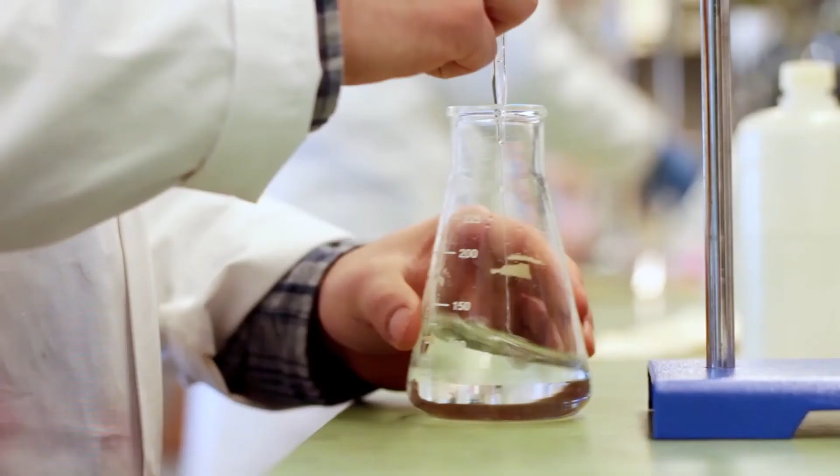Good morning and welcome to the mold making session, part of the Emerging Technologies in Automation conference. I'm Vladimir Franjo, Industrial Technology Advisor with the National Research Council Industrial Research Assistance Program. I started my career 30 years ago as a mold designer, and I have certainly been following the industry since.

There are a lot of exciting technologies around mold making, as with all the others in these times of new artificial intelligence technologies moving in that we are living. I'm really glad to have a group of speakers today that will present the latest and the greatest when it comes to mold making technologies.

The first is Amrinder Singh, engineer at Lincoln Laser Solutions. It's a long-time IRAP client, part of Whitfield Welding. He has a doctorate in additive manufacturing and over 3 years of industrial experience covering optimizing the process parameters, toolpath planning, and developing the feedback control system for defect-free additive manufacturing. Amrinder, welcome.

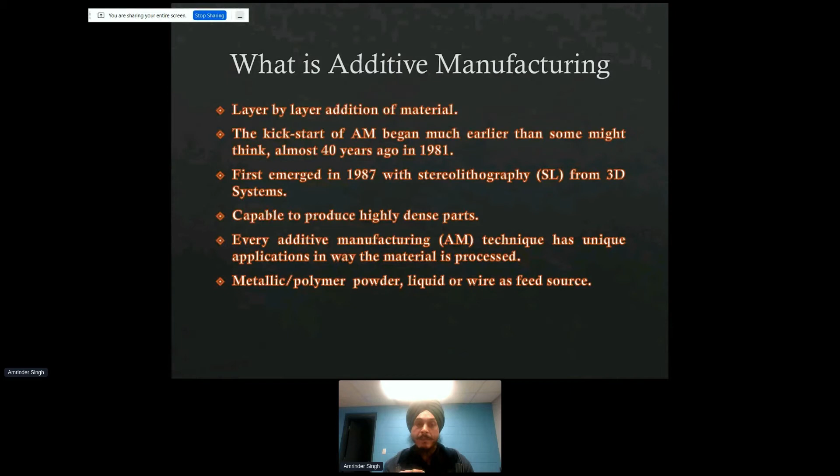Now, there are many kinds of additive manufacturing techniques available. I will classify them in two parts: one is metallic, another is non-metallic. My major focus will be on metal additive manufacturing, but I will just touch base on non-metallic additive manufacturing. In any kind of additive manufacturing, we can have a metal powder, liquid, or wire as a feed source and use it to make the layers.

Now, let me just touch base on non-metal additive manufacturing. There are majorly 4 kinds. I don't want to waste more time on it, but just touch base it.

The first is called VAT photopolymerization process, in which your UV laser hits the polymer resin and it solidifies. The platform keeps going down as you make each layer. One layer, platform goes down, makes another layer, platform goes down, and you keep building this big chunk.

In the material jetting process, instead of a liquid, you have wires, and then you melt it down to make a liquid, and the same way this platform keeps going down.

Then we have a liquid binder in this process, which is called binder jetting process. In this one, you have a powder bed, and you put a liquid binder on top, bind one layer, platform goes down, bind next layer, and you keep making the part.

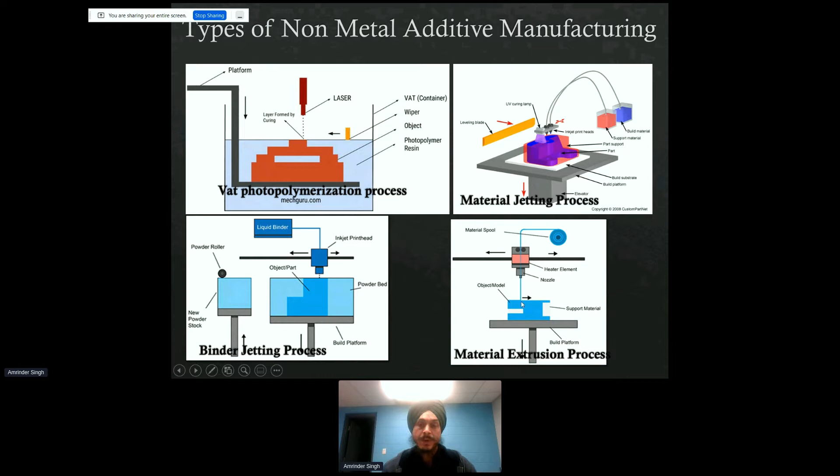This is the most famous now, material extrusion process, which we can buy at Best Buy or Amazon, where you have ABS or PLA material coming right through the nozzle, where you have a heating element. It heats just above the melting point, and it keeps adding layer by layer.

Now, this is my main focus, metal additive manufacturing, in which we have 2 different kinds. One is powder bed, and one which we are specialized in is called directed energy deposition process. In the powder bed, you have metallic powder on one side, which is called the build platform, and on the left-hand side you see the powder delivery system. So powder comes from the delivery system and goes on the platform to make the layer, and you have a laser coming from the top.

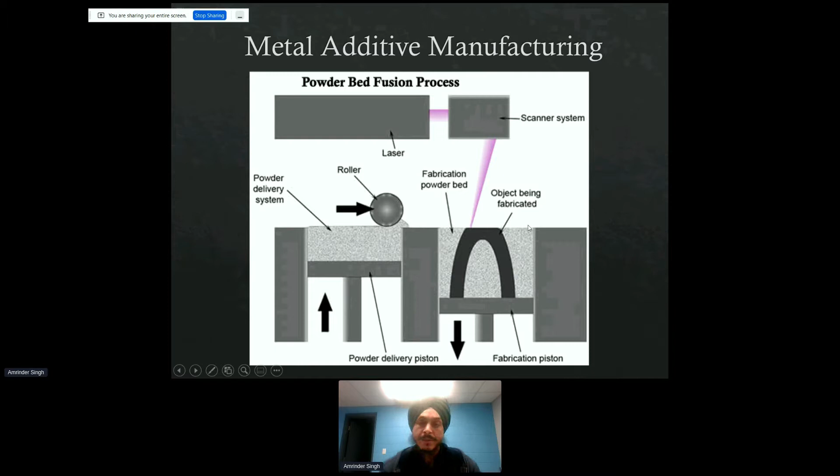So just giving an idea, because I want to focus mostly on my DED system, which will come in the next slides. What are the advantages here?

Well, the big one is freedom for design. Custom-made parts without any special tools. We can use multiple materials at the same time to make those layers. For example, you can make one layer with one material and the next layer with a different material, or one inside and outside, both can be different materials. Repair and remanufacturing - I will show the example and the application more as we go ahead.

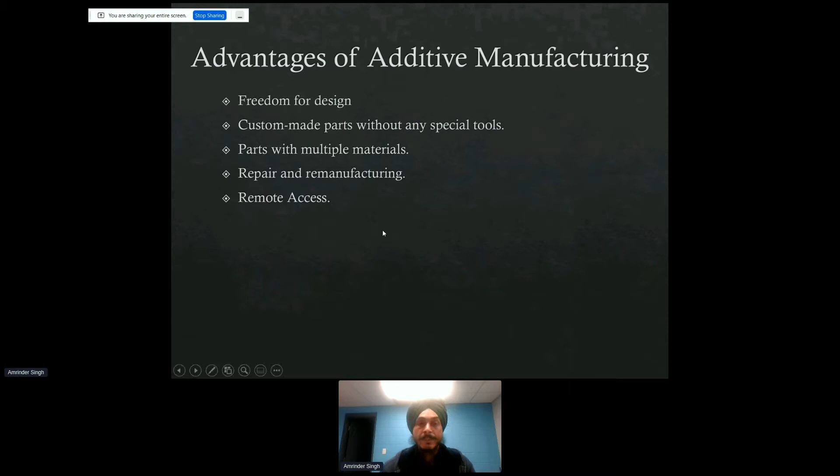This is just to give an idea why I'm talking about additive manufacturing here. Remote access - people can sit anywhere in the world, make the toolpath planning, and just push it out. It can be Mars or Moon, and the machine can be there, and you can just give the command and start right away. Someone can think, oh, it is very expensive. It depends. For example, if you keep customizing and you have a complex design, it might not be too expensive in the long run.

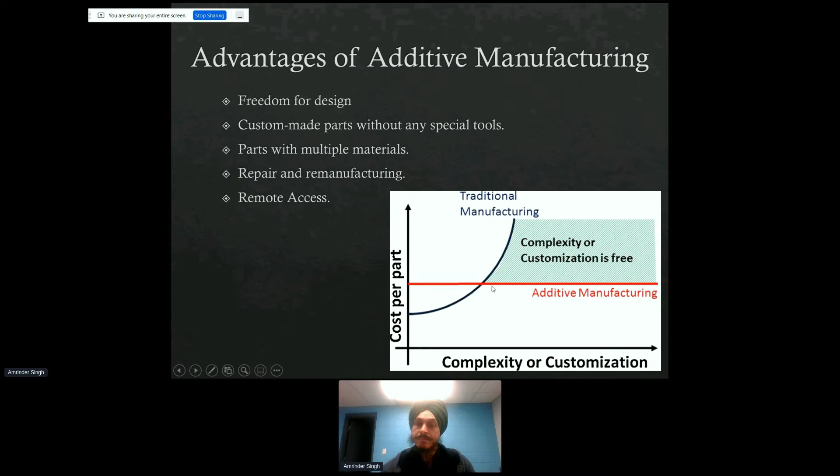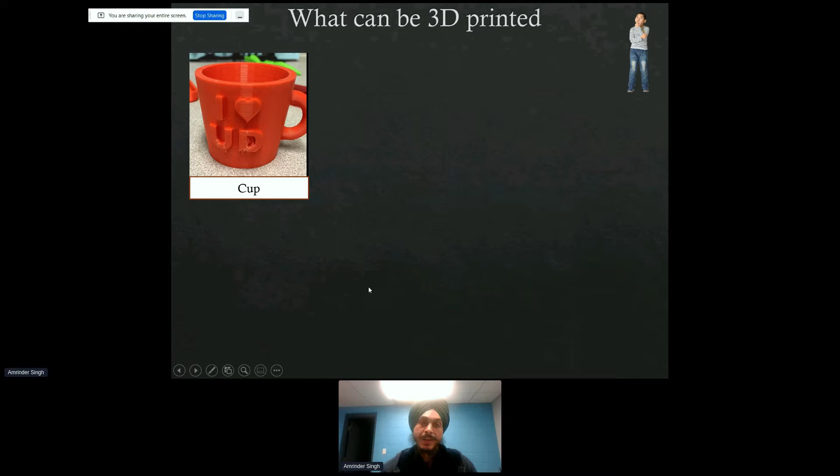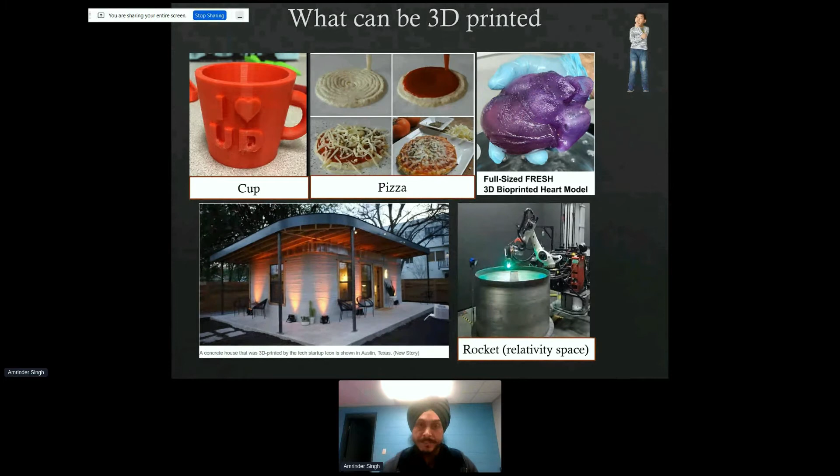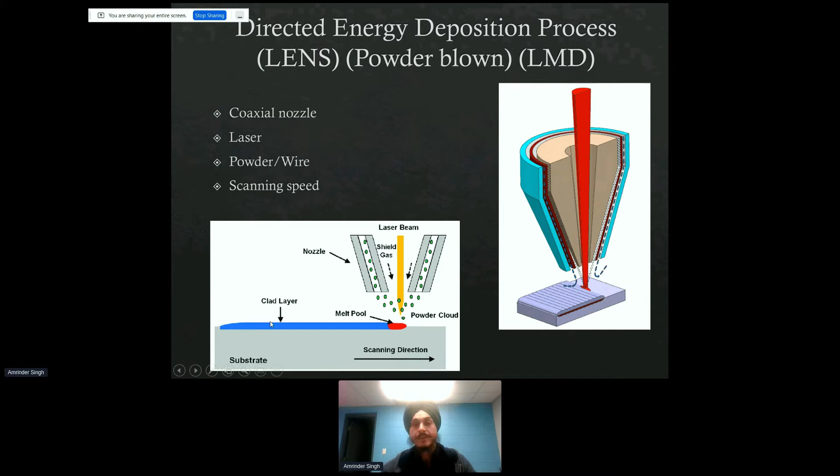Now, before we go ahead, let's touch base on the complete system functioning. So we have to have a controller which can control our movements, a powder feeder which can feed the powder to our coaxial nozzle, and the argon gas. As we are cladding or doing additive manufacturing of parts, we have to make sure that the melt pool does not come in contact with the atmosphere. For example, iron-based alloys can get oxidized very easily, and then we can have defects in our final product. So that acts as a shielding gas.

Not only powder, we can use a wire feeding system. Instead of powder, we can use a wire feed system, and then this is called wire arc additive manufacturing, WAAM. I'll go through it more as we come to the next slides.

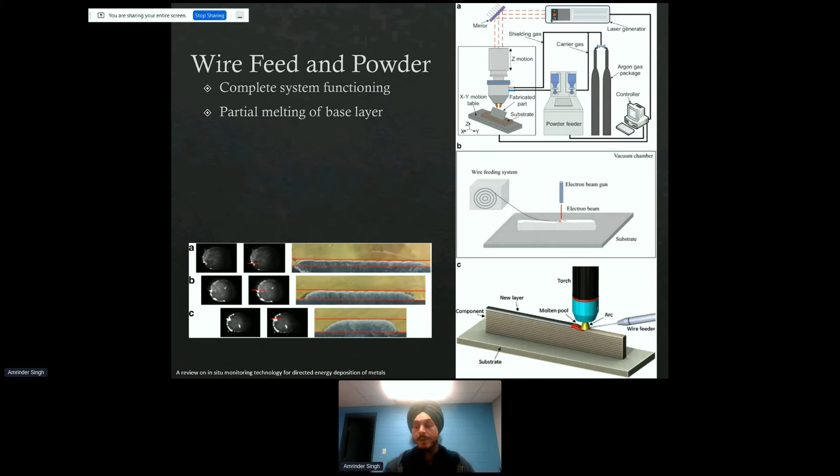So the best benefit of the directed energy deposition process is that when we make a layer on top, you can see we just partially melt the substrate or the previous layer, which makes a perfect bond, or metallurgical bond, with the base material or with the previous layer.

Now, in this process we have 4 different laser processing parameters which have key significance: laser power, scanning speed, scanning pattern, and powder feed rate. More the laser power, more the dilution, and higher the layer height. Higher the scanning speed, lower the height.

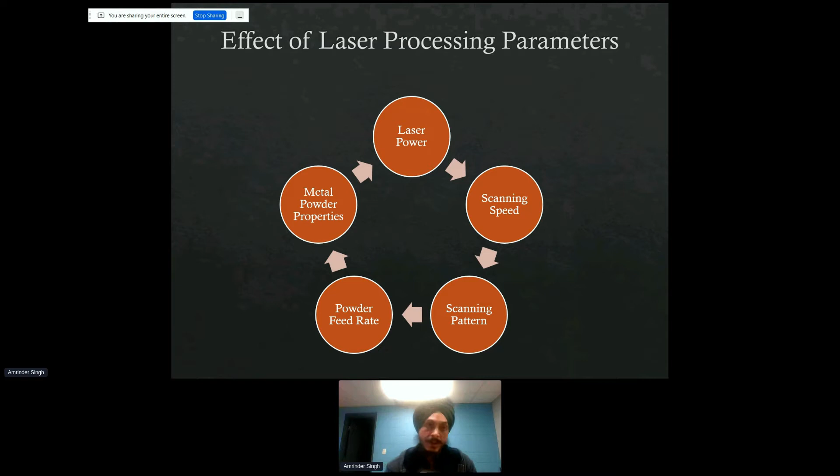So as we can see, all those parameters affect our deposition rates. Mostly the layer height is the key parameter which affects our deposition. The higher the layer height is, you can see we have gone from 0.05 to 0.1 centimeters, pretty much like 1 kg per hour. So it's a significant improvement.

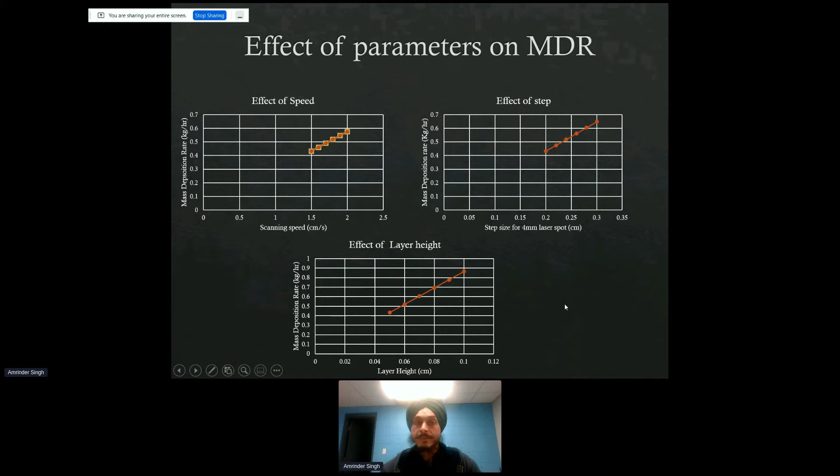Now some might think it's a slow process. We know we can do it - no, that's not true, it depends. In DED we have 3 main technologies available which I just showed you. Second one is electron beam, and third is arc plasma directed energy deposition process, in which we have wire feeder and then a torch. This is all computer controlled.

With this we can have a layer of 40 thou, and deposition rate can be as high as 10 kg per hour. Now if we need a thin layer only and it has to be produced faster, we can do that too, using our powder flow process and still have very, very high speeds of pretty much 1,000 millimeters per second.

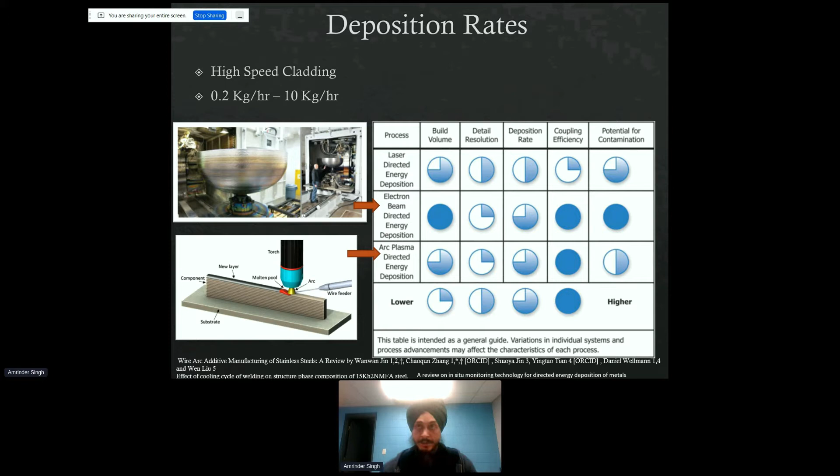Now let's talk about dimensional accuracy. Laser spot size can go from, in our facility, 0.5 millimeters to as big as 50 by 50. But at this bigger spot size we don't do cladding. For cladding we have 0.5 to 6. We can do hardening at 50 by 50. This is how this single layer, single wall is created by the system.

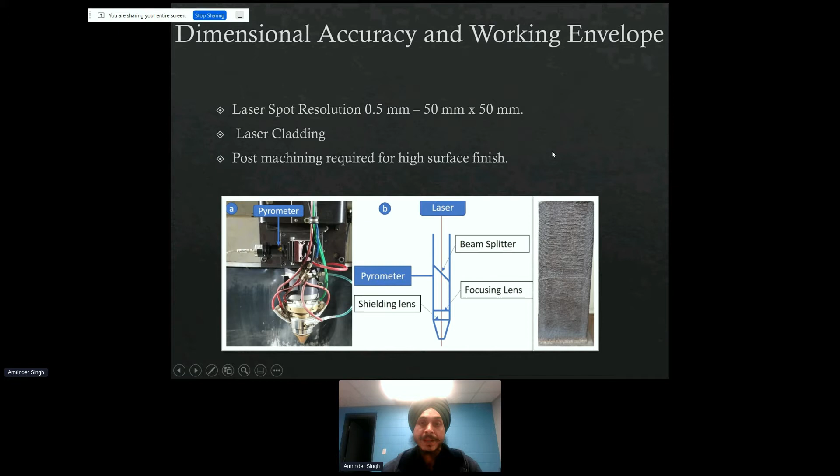I'll skip this one, but this just shows that at the same spot size we can vary the deposition rate depending upon the production. The whole motive of showing you the mass deposition rate is that there is flexibility where we can make it faster or slower, but again it depends upon the design and what the material kind is. But there is a range of flexibility of the mass deposition rate. So it's not slow, it's faster. But again, it comes to the part - what is the part about?

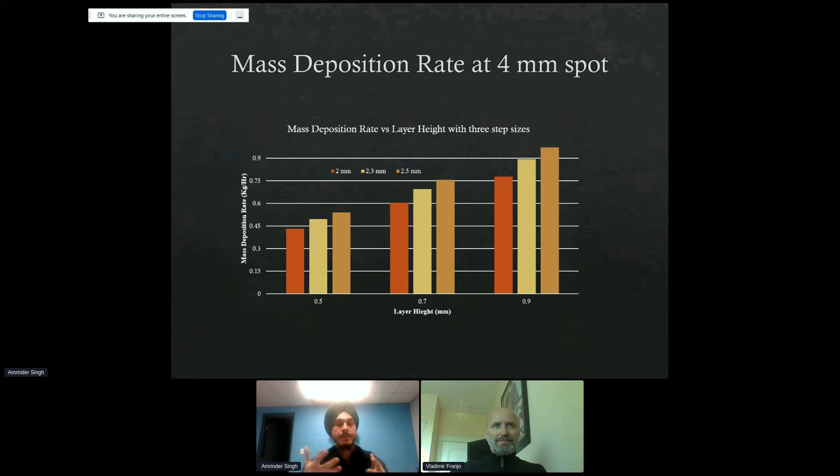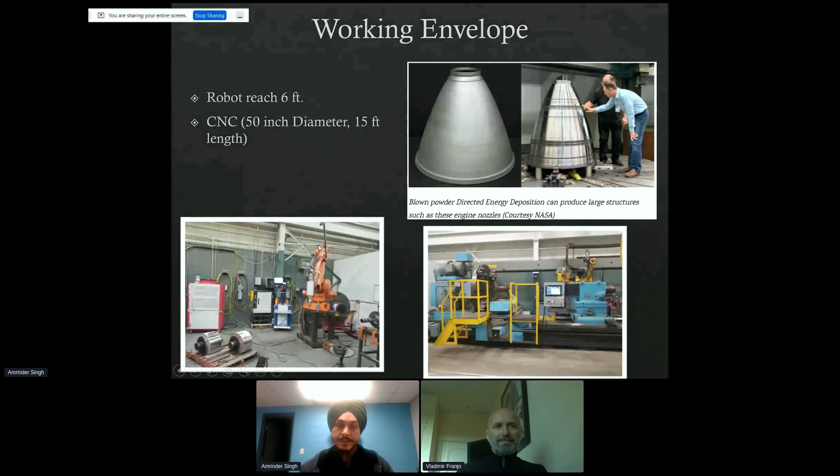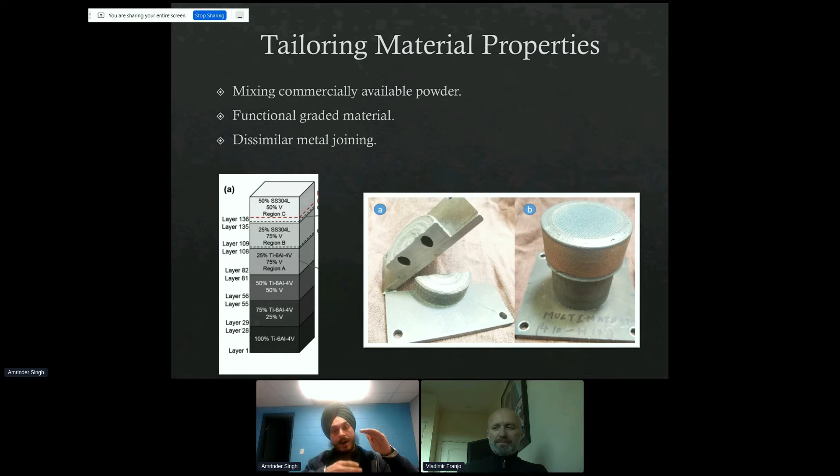Why is this technology so important? Because we can tailor the material properties. If we need a hard material on a soft one, yes we can do it. If you need a functionally graded material, we can do that too - we can have a different composition of different powders in every layer. For example, if you have a material which is softer on top, hard on the bottom, we can go gradiently harder, not just from soft to hard, to retain the properties.

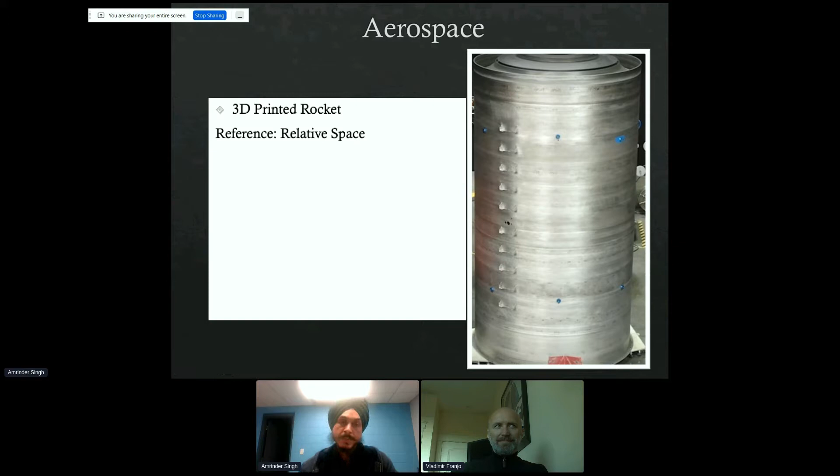Applications: aerospace, automotive, agriculture, tool and mining - infinite amount of application. Let's go aerospace - this is a 3D printed rocket. We don't deal in aerospace, but if it's a crazy idea, please go for it. We can have a discussion about it.

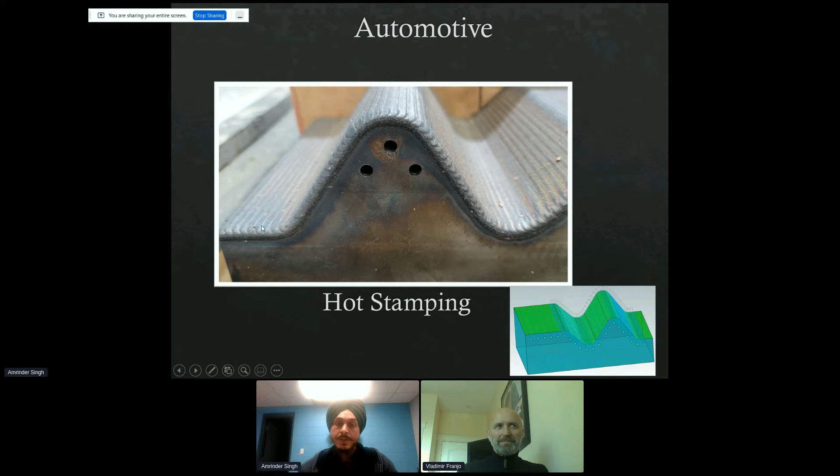Automotive - recently we made a hot stamping die. We did a cladding with a hard material on the hot stamping die. Just to show you the numbers, the clad was 60, and the base material was 30 HRC. So we made it from 30 HRC to 60 HRC, and pretty consistently.

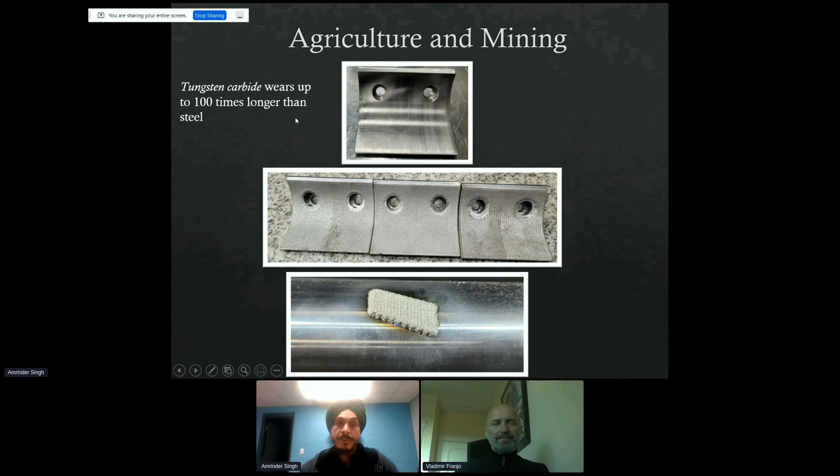From agriculture, we had this agriculture part - this is the shape of it - and we put tungsten carbide onto it using DED and made that steel 100 times longer wearing than regular steel. The tungsten carbide wears up to 100 times longer, so this part has now got 100 times more life than it was before.

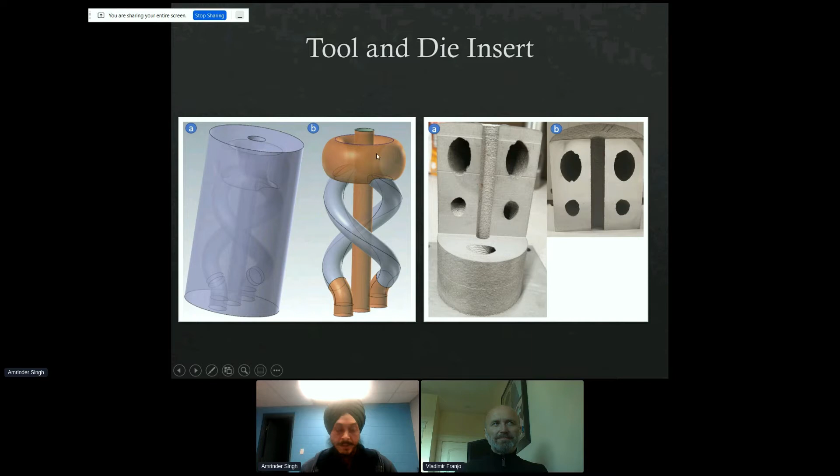Tool and die insert - so we can not only do cladding on the top surface, we can manufacture things layer by layer too. This is a perfect example: we made a die insert here using 410 stainless steel and made a spiral cooling channel which goes in, comes out, and we made a hollow structure on top which looks like this.

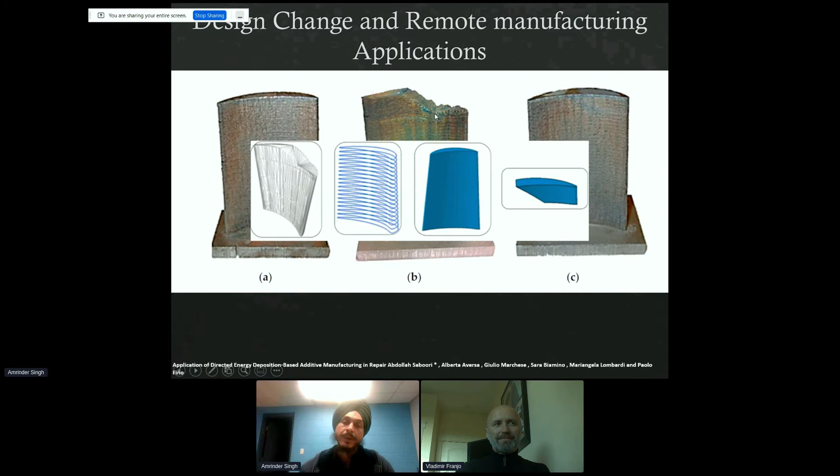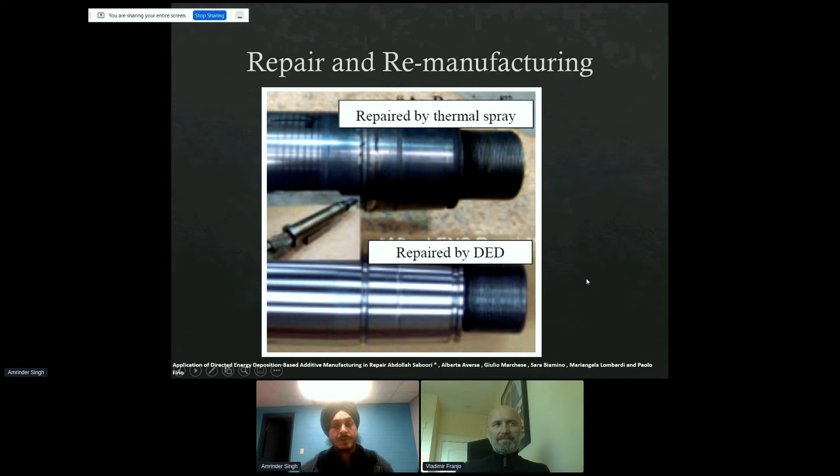We can repair the parts. For the turbine blades, if you're missing a chunk of it, it can be repaired back up again. Repair and remanufacturing. So not only can you make the things, but the reason I'm showing this repair here is because you can see that if you use thermal spray, it has a lot of heat affected zone, but by DED, you can repair the same thing having the least amount of dilution and least amount of heat affected zone.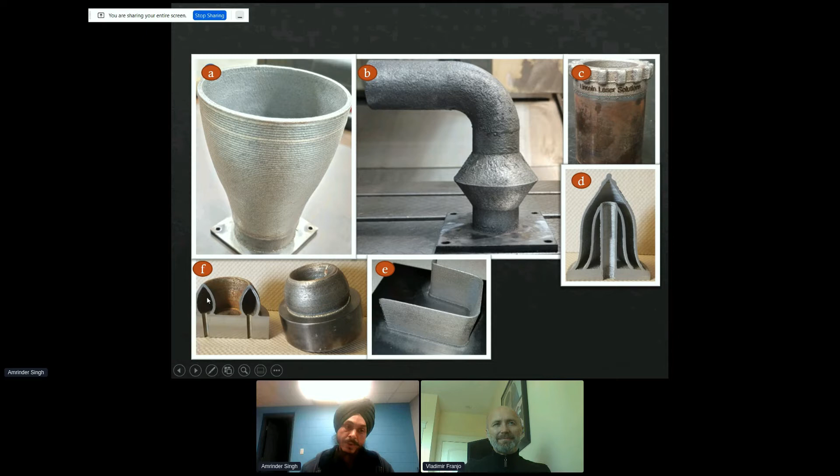Recently, we did a production job for a water cooling jacket. We had this base, and this is the final product. We 3D printed the cooling lines and the whole structure on top of this base supplied by the customer.

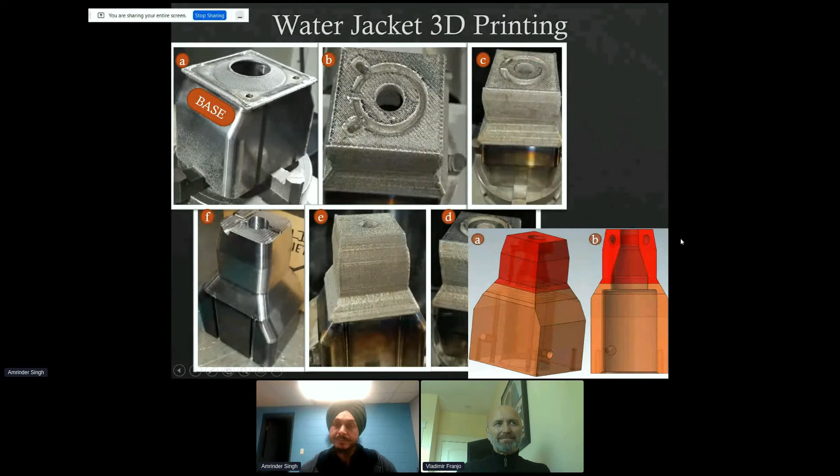And this is an in-house project we have. This was in the furnace, which used to supply the air inside the furnace, the hot air, and we remanufactured it and it's still working and functional.

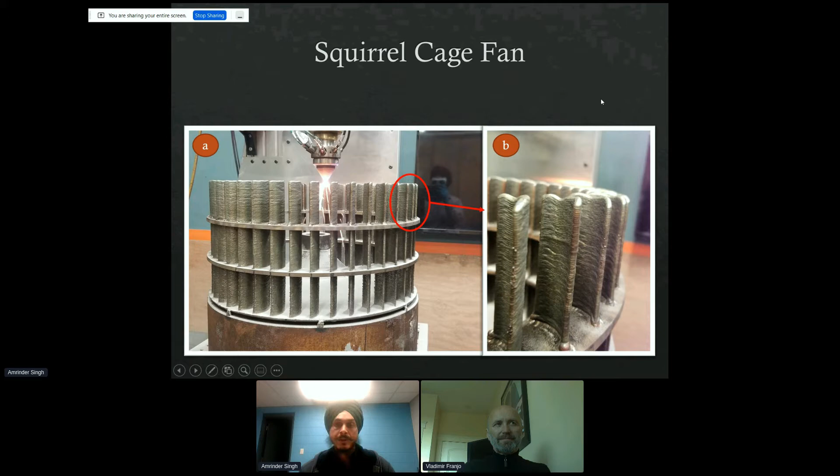There's something we made, a lifter, just to save material for them. I don't have much time to explain, but let's show you a picture here.

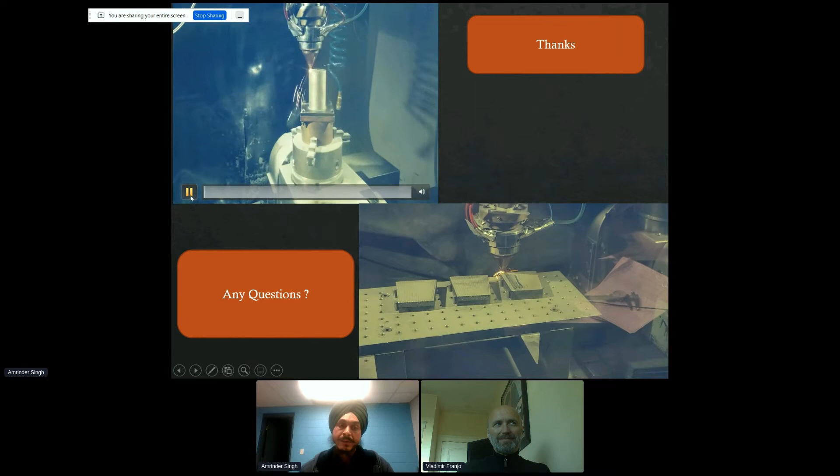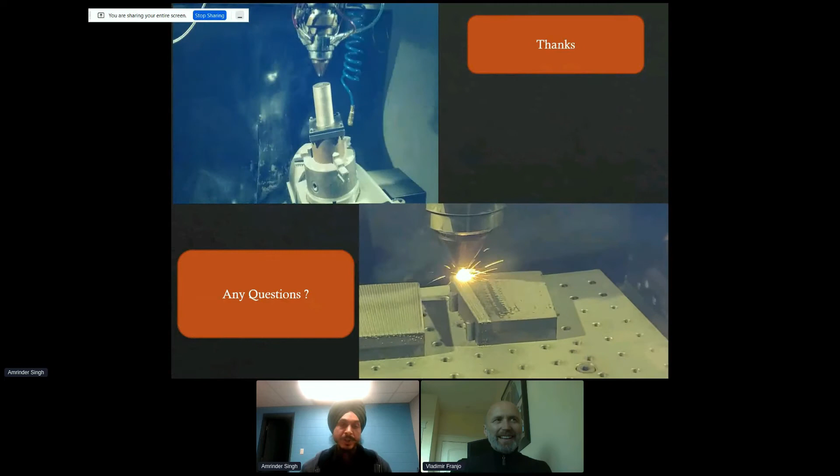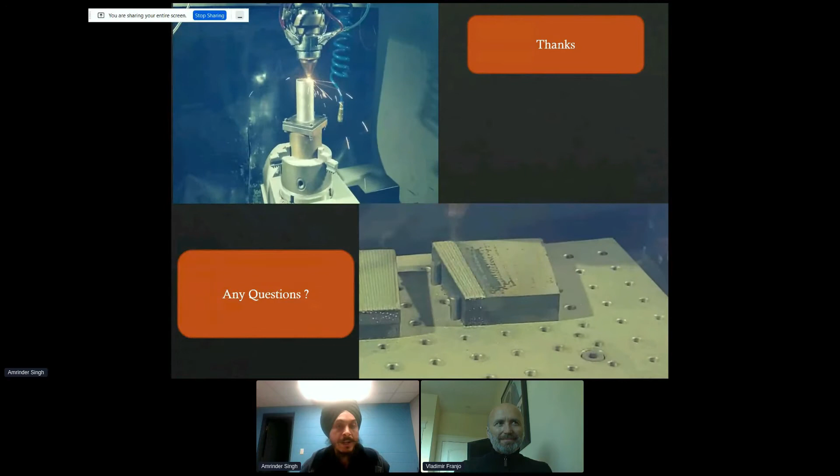So any questions for me? I was a little bit faster because I had limited time. Thank you. But I wanted to show you the scope of an application of the additive manufacturing technique, especially the DED, where you have a better metallurgical bond, and it has infinite applications. So please let me know if you have any crazy idea in your mind. Thank you so much, I am open to any questions.

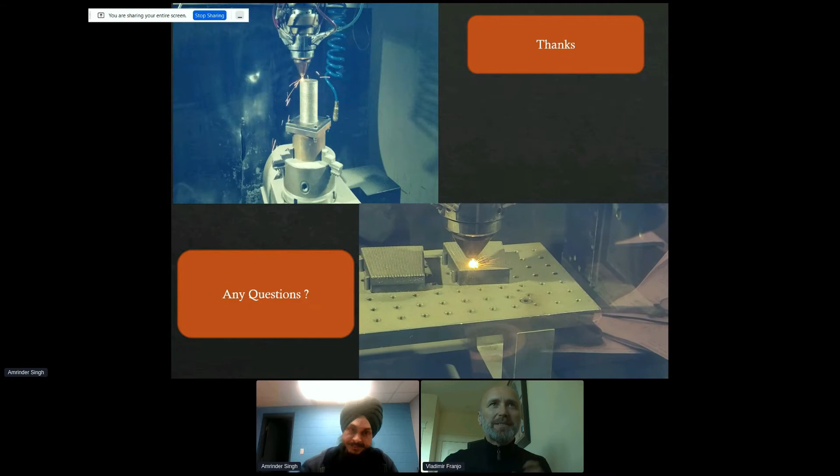Thanks a lot. Unfortunately we're kind of running out of time, but in the presentation there was a question regarding the size of parts that you can manufacture, and you have covered that in your presentation, sort of. But maybe you can clarify, because your technology is capable of handling large parts, how large of a part can you handle?

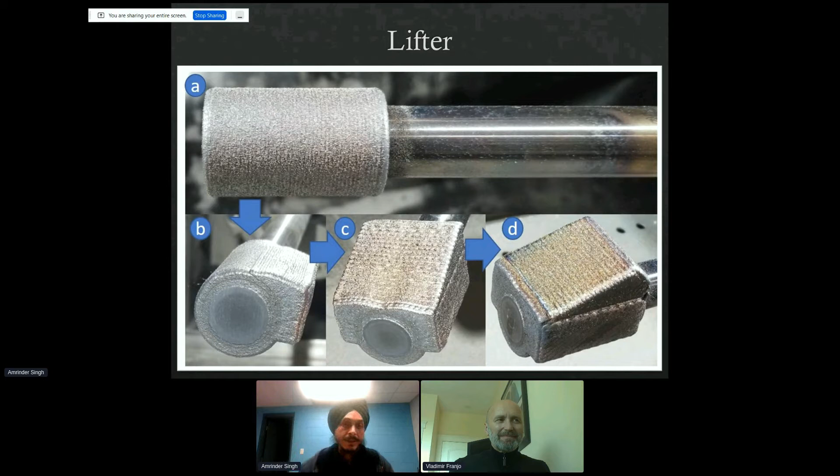Well, practically we have a 3 meter robot which can print a 3 meter big part. But we can always enlarge our envelope if there's a requirement. For now, the largest would be 3 meters from our robot's point of view. We also have a CNC, which, for example, in these two slides you can see, has an envelope of pretty much 12 inches higher and 24 inches on the sideways.

So let me start with a basic definition of digital twins. Essentially, it's the virtual representation of a physical product or process. That's not the full definition yet, but we've been looking at these types of digital twins for a long time. When we look at a schematic, a blueprint, a CAD, or even virtual reality, essentially that's the representation of the fit, form, or function, or the virtual representation of the physical part.

So I mentioned that we have a physical product or a physical process, and we have the virtual product. Now, what makes this digital twin important is the connections between the physical and the virtual. So we'll have some kind of communication between the physical and virtual product. It's not just enough to be a representation, but we need a connection. So what is that connection?

And that's data. So now we can expand our definition of a digital twin to say that it's the virtual representation of a product or process using data, and not just any data, it's real-time data. For example, we can put sensors on a physical product, and those sensors will generate data and then transmit to our virtual product. So then what do we do with that data?

The virtual product has to do something with it, and it provides information. So now we can fully define our digital twin, which is the virtual representation of physical product or process using data, and using that data to provide information by analyzing that data. Essentially, when the physical product generates data from the sensors that's transferred to the virtual product, we analyze that data and provide that information back to the physical product so we can then optimize it. That is really the essence of a digital twin: making sure there's a constant communication flow between the physical and virtual environment so that we're always optimizing that environment.

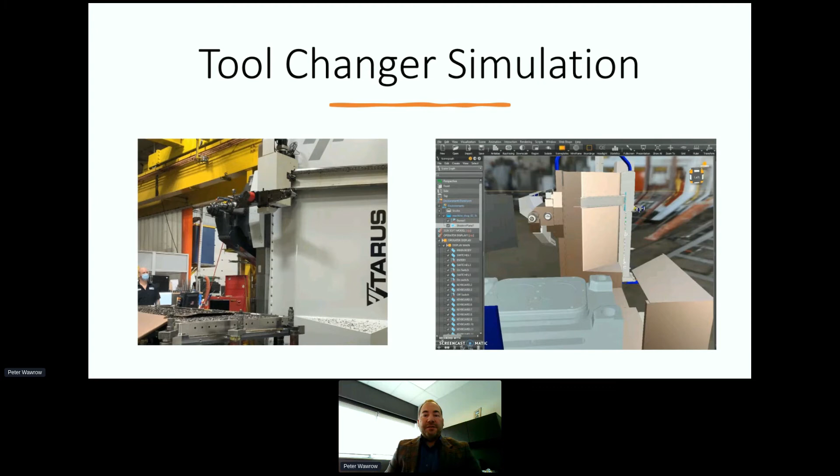So the next steps would be to start putting sensors on that physical part, collecting data, and then generating that information or data analytics. With that, I'm going to pass it over to Linsey and have her present the virtual reality aspects of what we had done with respect to this project.

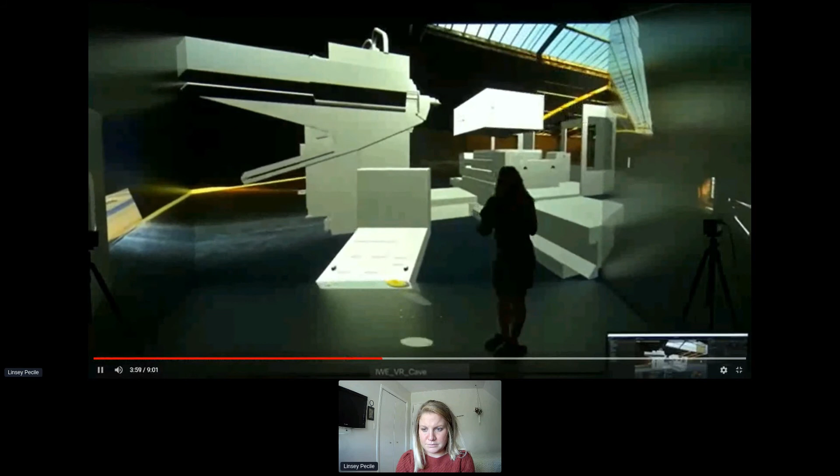So it's not showing you what I told it to do. It's not showing you like a video game where I tell it to move 4 feet to the right and it actually moves 4 feet to the right. It's actually reading the program G coding of the specific mold and the cut path that it needs to take, and showing it up here for you to visualize in the VR cave before you actually implement it and design it and cut it on your shop floor.

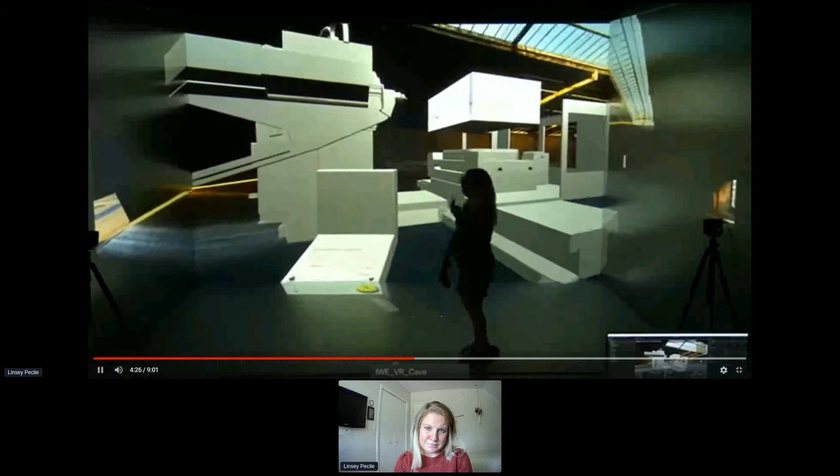So drastically different. It's understanding and taking the approach that if there is a problem, you're actually going to see it in here. Whereas with an animation, if there is a problem, you're not going to see it because I went ahead and just told the program to forget about it, don't worry about it, just do what I'm telling you to do.

This is taking the G coding, this is taking the cut program that is programmed specifically for this mold, and it's taking into account, can I do this? Okay, it's looking at the simulation side versus the animation side. So we were able to do this in Unity. We were not able to do this in our ANSYS software that we were utilizing at the very beginning phases of our project.

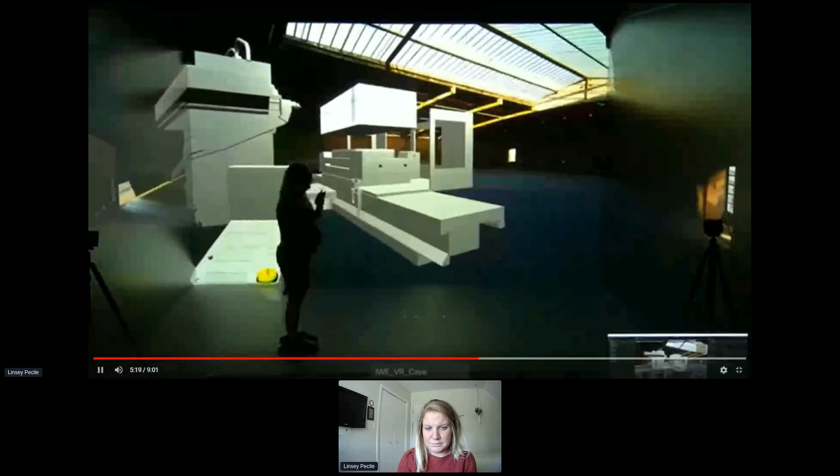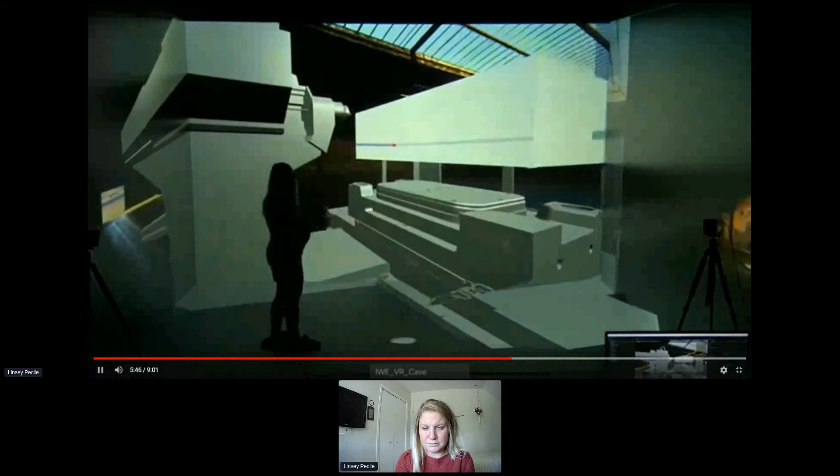So I'll just move around here so you can see more of the mold. So you can get right up in here. So we do have, just to show you, this is our testing console box at the top here. Underneath of it is the actual mold cavity that would be created after this was done cutting. So I can come right up in here and get really up close and personal with it.

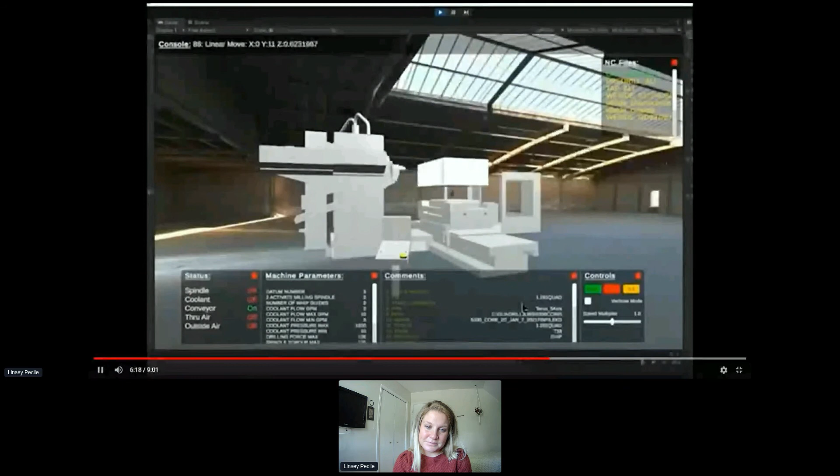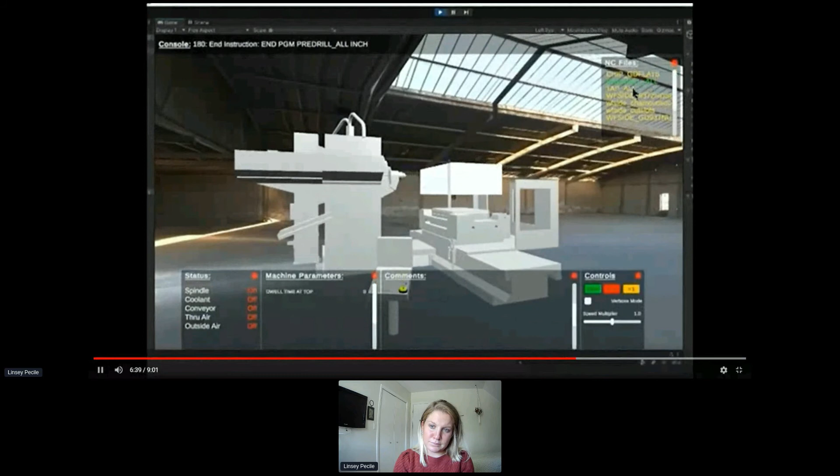And the last part that I'm going to show you today is the behind the scenes of what's happening on Unity and the console GUI coding that was created specifically for this mold and the programming, the cut path that it's supposed to follow, that it's supposed to take. So you can see on my screen is the GUI console.

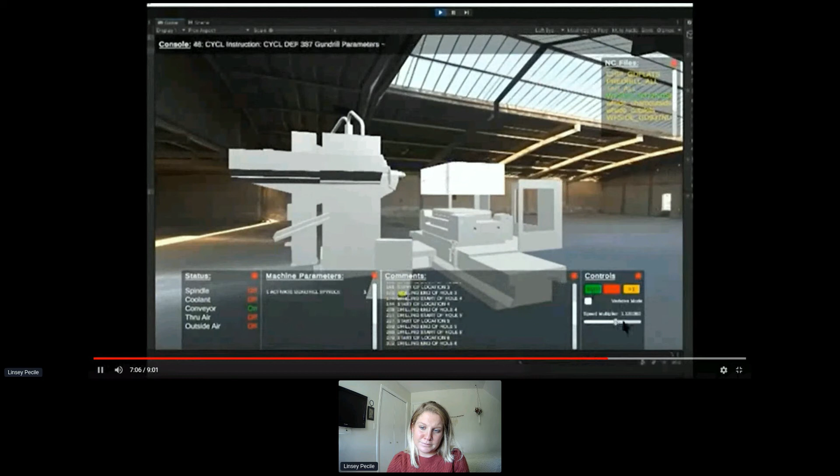It shows you the different aspects of what you might see on the shop floor in terms of what's running. So in the top right, you have your NC files. So these are all of the different pre-programmed coding that needs to happen and the path that this gun drill needs to take in order for it to cut and drill in the right places and for the right amount

of time and at the right amount of speed and everything else that gets programmed into this that tells the machine physically on the shop floor where it needs to go and what it needs to do in order to create this mold. We've taken that and we've put it into our GUI console here on Unity, which then tells Unity what to do so that we can replicate this in the virtual world.

So you can see on the bottom left, you have your status of if your coolant is turned on, if you have outside air coming in or not. Those will change as this is running through the programming. On the top left hand of the screen, you also have all of the code and exactly what it's running through at each point, at each given time.

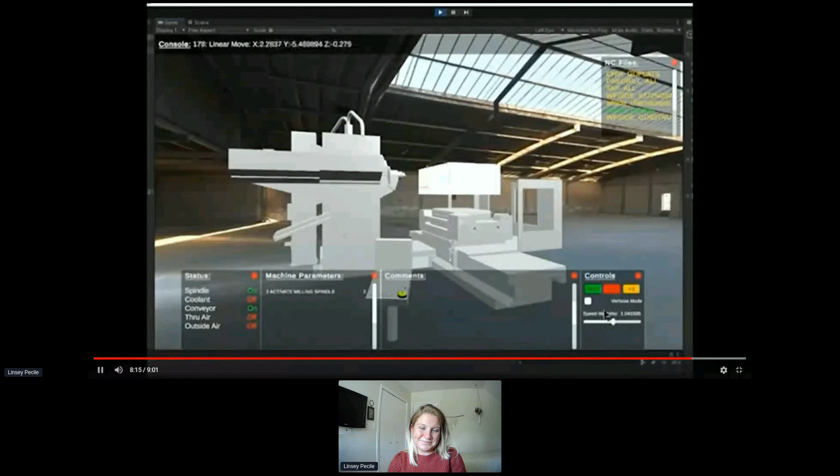Now, this might not mean anything to you, but that's okay. What it really means is that it's following a specific set of parameters, a specific set of instructions, so that this is going to give you the end result that you desired.

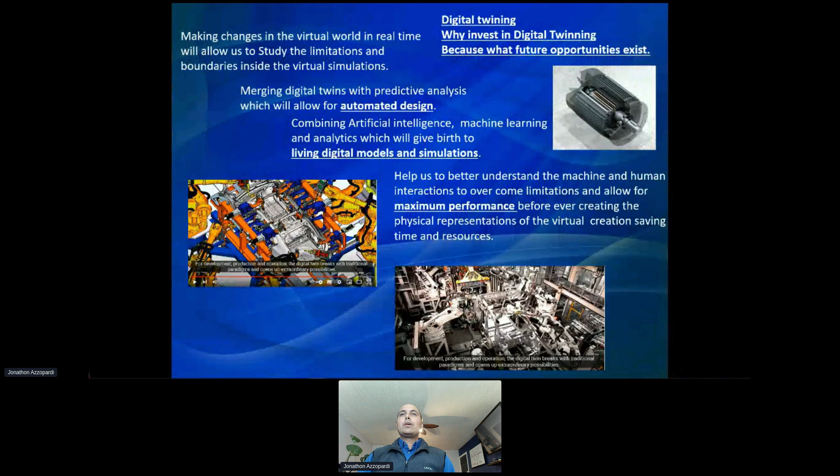But it really wasn't this that got me excited, because I believe all this we can do today, and it's really not that amazing. What the future brings for me is what really excites me. And what that is, investing in a digital twin. What are you investing in? You're investing in the opportunities of the future. So really what I'm looking forward to is working inside the virtual simulation. And if we can work inside the virtual simulation, we're going to make changes inside that space real time.

Now, why is this important to an owner operator who's trying to operate his business in manufacturing today? Because merging digital twins with predictive analysis is going to allow us to automate design. We're in a space now where designers are hard to come by, right? This is a space that we need more designers. If we can automate the design process, this is going to make us more effective. This is going to allow our designers to be able to do more because we can automate that design because we've combined the two technologies in the virtual space.

Then once we get good at that, we're going to combine artificial intelligence with machine learning. And that'll give birth to analytics that will give birth to living digital models and simulation. Now that's a big word, right? Living digital models and simulation. But I put two examples on my slide just to give you a simple and then a little bit more complicated design. So we have a simple electric motor, right? And these are something we depend on all the time. But if we can figure out how to make that a living model to understand if it's going to fail or if we can improve it, or simple design changes that can really augment its efficiency, we do that in the digital world.

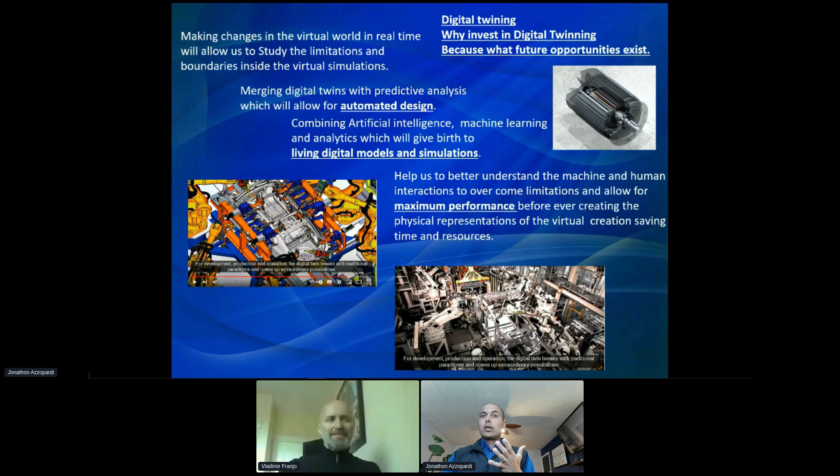And then the last thing, I gave you a really complicated example there of, let's say, an automation assembly cell. And that cell is very complicated and difficult, but if we could do it in the simulation world, we could avoid a lot of errors. And this will unlock maximum performance for human and computer interaction.

I know I'm right at the time, right, Vlad? So I'll leave it at that. And I prepared some questions for you, but you answered them; these were really my questions that you covered brilliantly.

I do have one, maybe just to help everyone, because I've been at Laval. I know how large your molds are, but maybe that's hard to sometimes transfer via video. So how large are your molds that you manufacture? Well, that's a great question, Vlad. Thank you. We build some of the largest molds in the world, and the last one we just shipped was actually going out at about 180,000 pounds. And the amount of steam lines that are in it are literally thousands of inches. I think we were at about 16,000 inches of steam lines in one mold.

And this is where virtual reality also can play a role. I mean, these are large products. You may want to do it virtually before you get into making the real thing. That's yet another application if anyone's making something very large, certainly worthwhile connecting with VR Cave and St. Clair College.